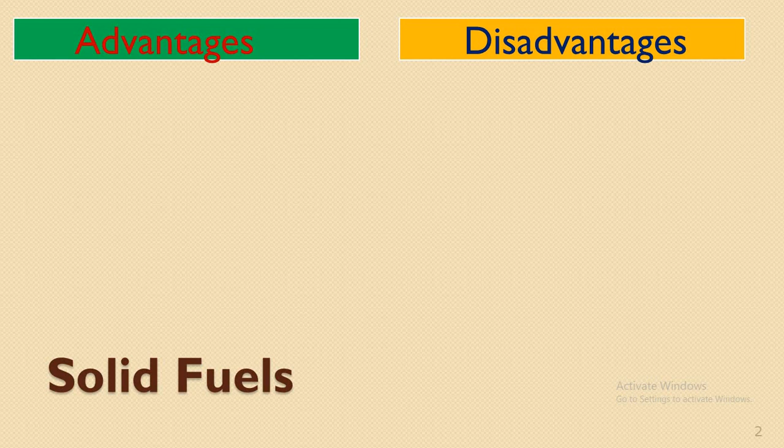we'll talk about a few advantages as well as disadvantages. Now the advantages of solid fuels are: solid fuels are easy to transport. Most of them are usually moved from one place to another using goods trains, by means of ship, or by means of road. So it is very easy to transport solid fuels without any fire hazards; they are more safe to transport.

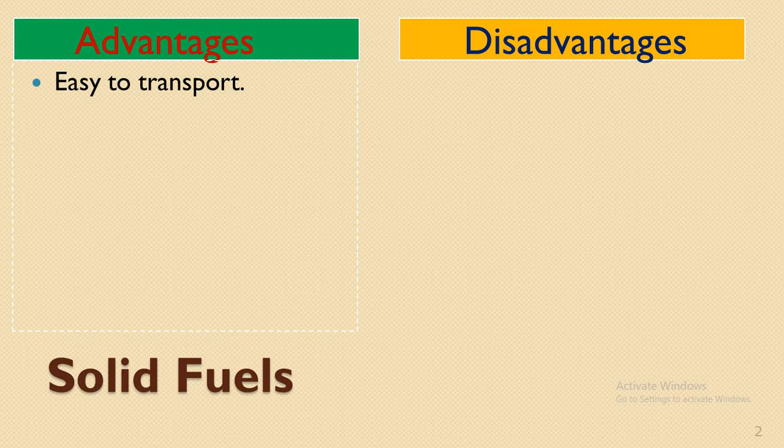They are convenient to store without any risk of spontaneous explosion, as I have already told you. Usually, in order to ignite the solid fuel, it takes a higher ignition temperature compared to liquid and gaseous fuel. It is not so spontaneous in its combustion reaction; it takes its own time to set its ignition and allow the combustion reaction to occur.

Apart from that, the cost of production of solid fuel is usually low. The cost of processing or extraction of this fuel from natural resources is usually considered to be low compared to the other forms of fuels, that is liquid and gaseous fuels.

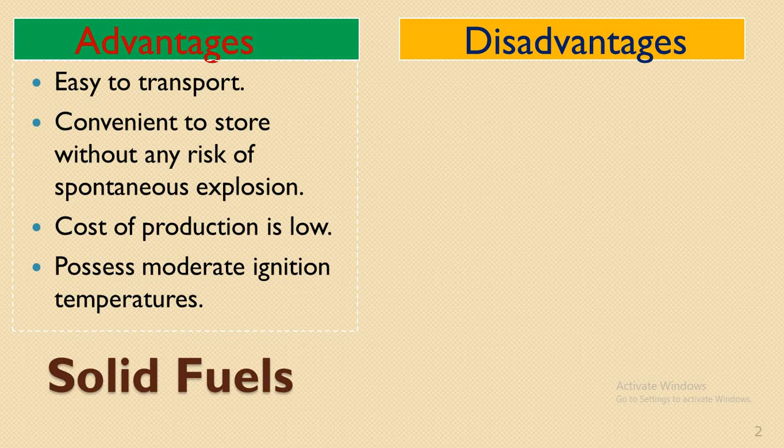And apart from that, they possess moderate ignition temperatures. As I have already told you, the ignition temperature should neither be too low nor too high. So when ignition temperatures are moderate, they would be properly utilized and would not cause any fire hazards. It is easy to handle such kinds of fuel forms. So these are the set of advantages of solid fuels.

Now let's talk about disadvantages. The disadvantages of solid fuels: as you already know, it tends to form a non-combustible residual matter at the end of the combustion reaction, that is, ash content.

The ash content is high when it is burnt completely, and also a lot of heat is wasted during the combustion reaction, as a lot of heat is utilized in driving off the non-combustible matter as well. So it has low thermal efficiency, and it also has another problem in dealing with clinker formation.

As you know, the ash particles fuse together to form lumps of ash. This is called clinker, and during the combustion process, when fusion temperatures are attained, clinker formation results.

When clinkers are formed, these clinkers which form over the surface would not allow proper air circulation to the rest of the fuel present for combustion. Therefore, lack of air supply to the rest of the fuel leads to incomplete combustion and inefficiency of the fuel.

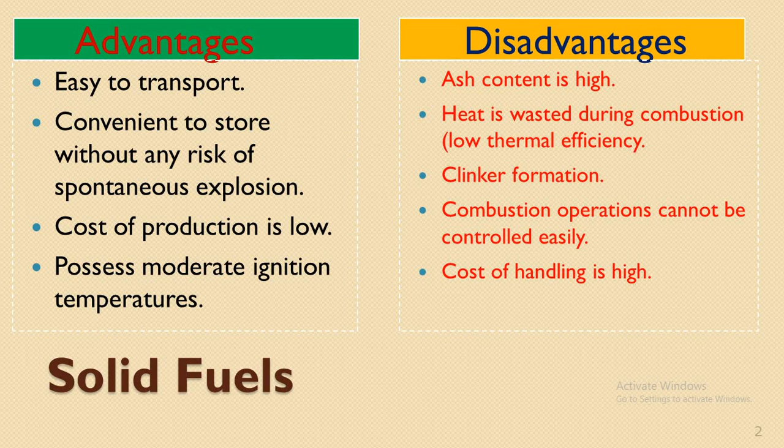And apart from that, because it has a lot of residual matter remaining after the combustion reaction is complete, you need to engage more labor to handle this residue after the whole reaction is complete. It also has comparatively low calorific value when compared to liquid and gaseous forms of fuel.

Usually anthracite has about 8,800 kilocalorie plus approximately of calorific value, whereas liquid fuel has about 11,600 plus calorific value, depending upon the refined form of petrol, diesel, or kerosene available, which is comparatively high. And similarly gaseous fuels have about 14,000 kilocalorie per kg or per meter cube.

So we have higher efficiency of the fuel when compared to solid fuel. Solid fuels are usually less efficient. The calorific value even of the most efficient form of solid fuel is recorded to be less than the liquid and gaseous forms.

And the excess air supply required is also more for solid fuels. You need sufficient supply of air for proper combustion reaction, else it leads to incomplete combustion, and the amount of air required for burning the solid substance is usually considered to be more.

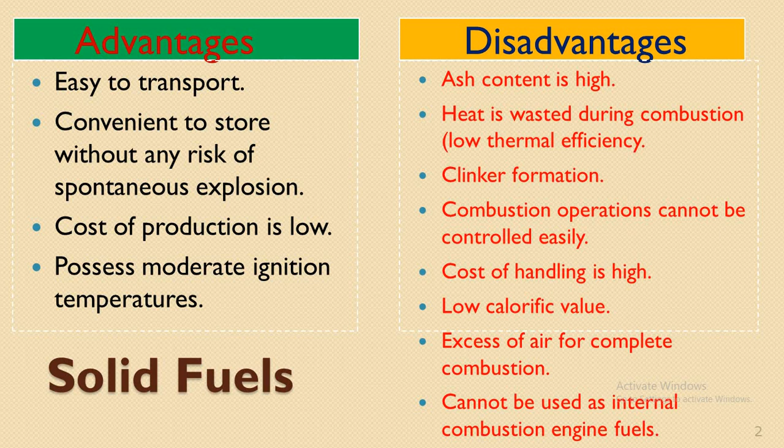So these are certain limitations or disadvantages of solid fuels. Over solid fuels, when we talk about liquid fuels, they are considered to be the better forms in handling, usage and efficiency. So let's talk about a few advantages of liquid fuels.

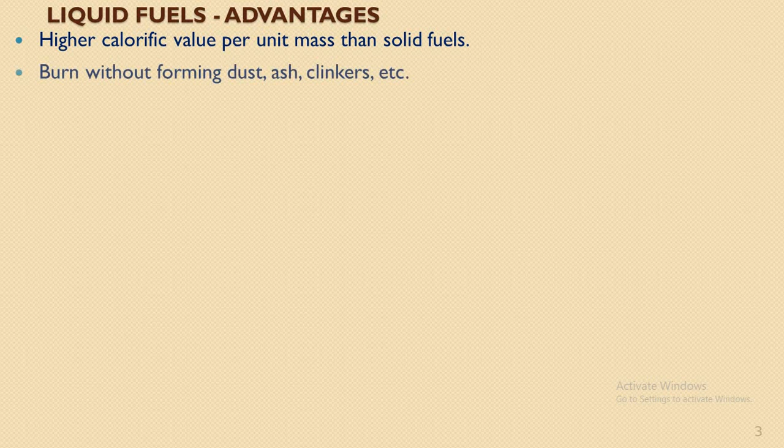They have higher calorific value per unit mass than solid fuels, and they burn without forming any ash or clinkers, and they do not emit dust during the combustion reaction. Apart from that, firing is easier, and fire can be extinguished easily by stopping the liquid fuel supply. As I told you, you can easily control the combustion reaction when using either liquid or gaseous fuel compared to solid fuels.

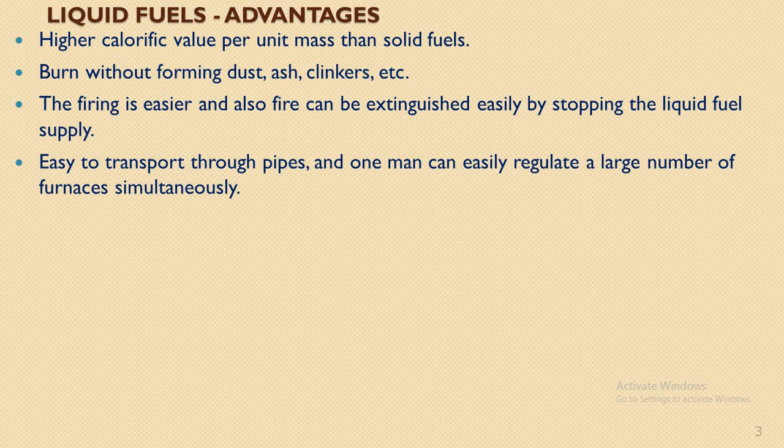Apart from that, you can easily transport these liquid fuels through pipelines, and the number of manual laborers required to regulate this process can also be less. One can easily regulate a large number of furnaces simultaneously, so one person can manage the whole handling process. They can be easily stored indefinitely without any loss—this is another advantage of liquid fuels. Using proper containers, they can be stored safely and utilized properly.

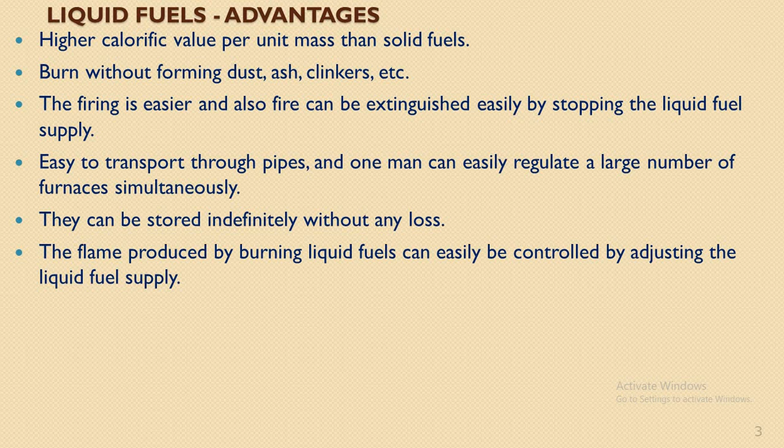The flame produced by burning liquid fuels can easily be controlled by adjusting the liquid fuel supply, as already discussed. They're more clean and economic in terms of labor. The residue formed at the end of the combustion reaction is usually less compared to solid fuels, so they are more economic in terms of engaging manual labor. Also, the loss of heat to the chimney is very low due to greater cleanliness.

If you observe in most rural areas, those still using solid fuels like coal or wood, you'll notice the kitchen is equipped with a chimney, a very long chimney which moves out, helping remove the formed dust or smoke evolved from burning the solid fuel. There's a lot of heat loss during this process, so with liquid fuels you can actually reduce the heat loss from the chimney as well.

There is a great amount of cleanliness maintained at the place of work, and the labor engaged in managing this fuel is also less. So these are certain advantages.

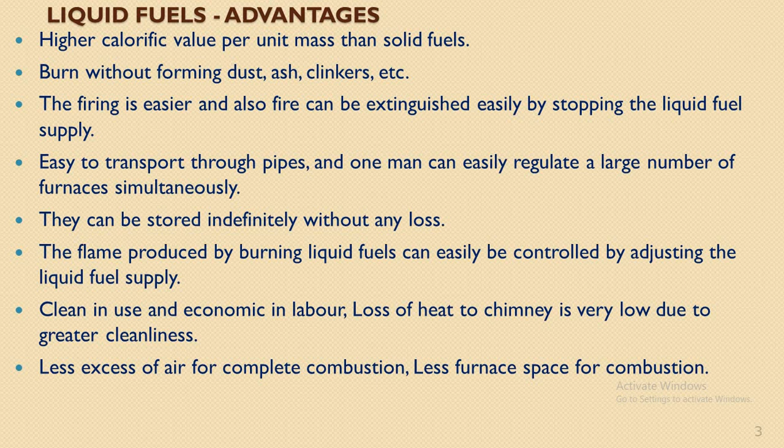Apart from that, compared to solid fuels, the amount of air to be supplied for proper, complete combustion is also less. There's no wear and tear because it's not a solid fuel—the wear and tear of grate bars and cleaning of fires is usually less compared to solid fuels. So these are the main advantages.

Other than that, liquid fuels can be used in running internal combustion engines. Today we see a lot of internal combustion engines run with liquid fuels like petrol, diesel, etc. Your automobile engines are usually internal combustion engines, so they can be conveniently run using fuel forms which are totally liquid in nature.

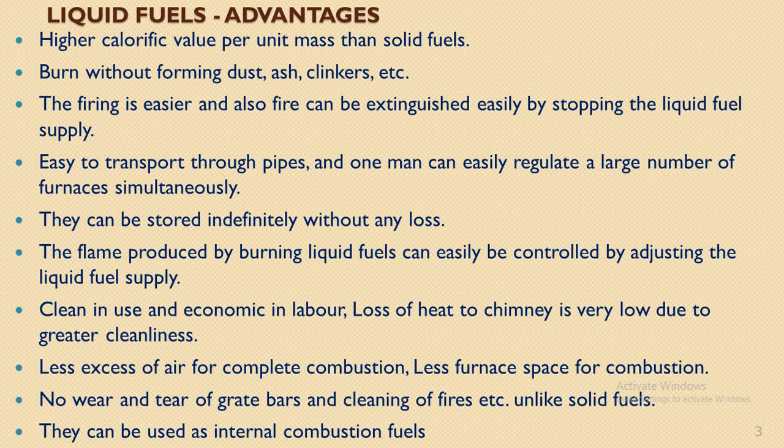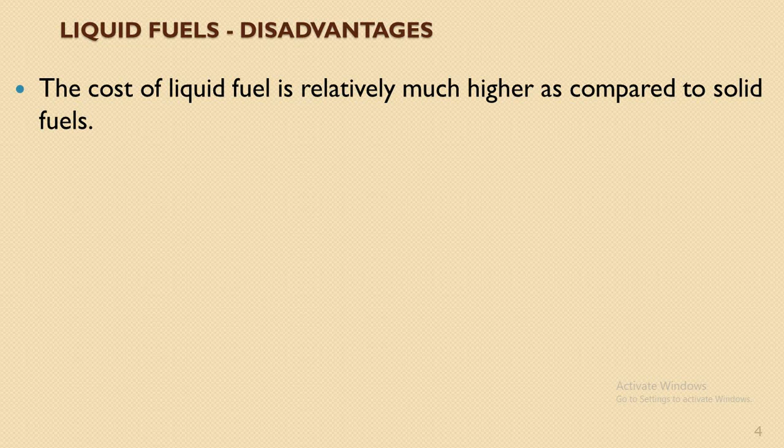So these are the advantages, and let's discuss a few disadvantages of liquid fuel. The cost of liquid fuel is relatively much higher compared to solid fuels. The cost is more because of their comparatively lower abundance in our country, and apart from that, the processing of liquid fuel is usually more costly.

Costly special storage tanks are required for storing liquid fuels. When you compare the storage equipment required for solid and liquid fuels, it is usually observed that for solid fuel, any dry conditioned space is sufficient. Though the space occupied by solid fuel is more, maintaining dry conditions is sufficient for storing it properly, and you don't easily find fire hazards occurring when storing the solid form of fuel.

Whereas for liquid fuels, you need to have proper storage tanks engaged, which again is a cost affair that is comparatively more than for the solid form of fuels.

There is a great risk of fire hazards compared to solid forms of fuels, because mostly in summer there are more fire accidents occurring due to the volatile nature of petrol. The volatility of petrol is considered to be almost at room temperature, so a greater amount of fuel can actually go to waste when such fire accidents occur due to its volatility. So the volatile nature of the fuel is actually reducing the possibility of using it more safely.

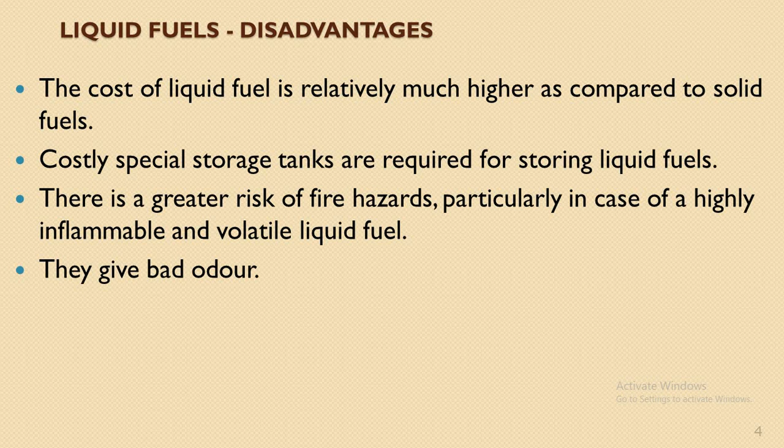They have bad odor. This is another disadvantage of liquid fuels. Usually when you go to petrol bunks, you can see such strong odor coming out from the bunks with liquid fuel forms, that is petrol and diesel. So they have a lot of odor that affects the area where it is stored and where it is used.

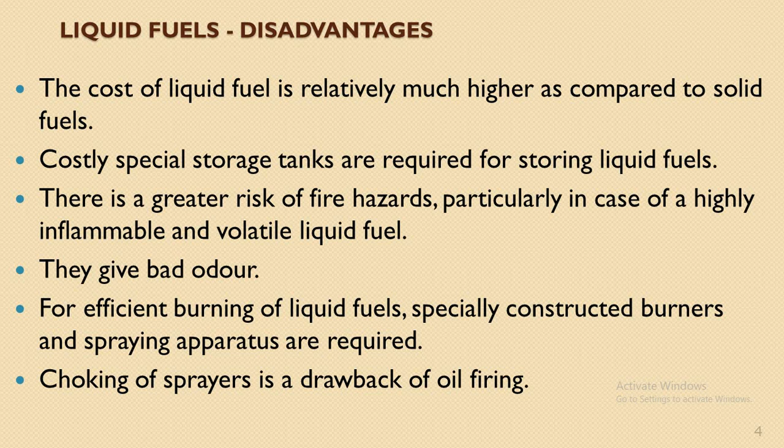For efficient burning of liquid fuels, specially constructed burners and spraying apparatus are supposed to be used. These apparatus are usually designed so that there is proper utility of these liquid fuels without any problem, that is, without any fire hazards caused at the place. Especially when choking of sprayers occurs, it leads to a drawback of oil firing. So it immediately sets fire at the place and may cause serious fire problems.

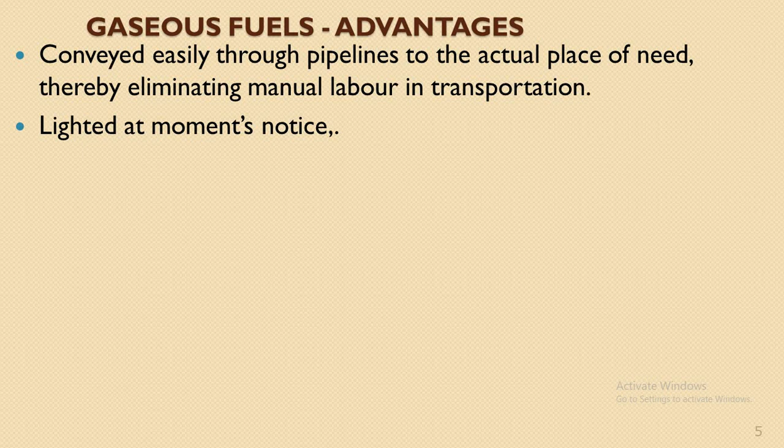Now let's talk about a few advantages of gaseous forms of fuels. The gaseous fuels mostly used in day-to-day life are CNG and LPG. These gases can conveniently be moved from one place to another through pipelines, giving very easy transportation without much manual labor. They can also be lighted at a moment's notice, that is, ignited very easily, and they have high heat content, helping us achieve higher temperatures.

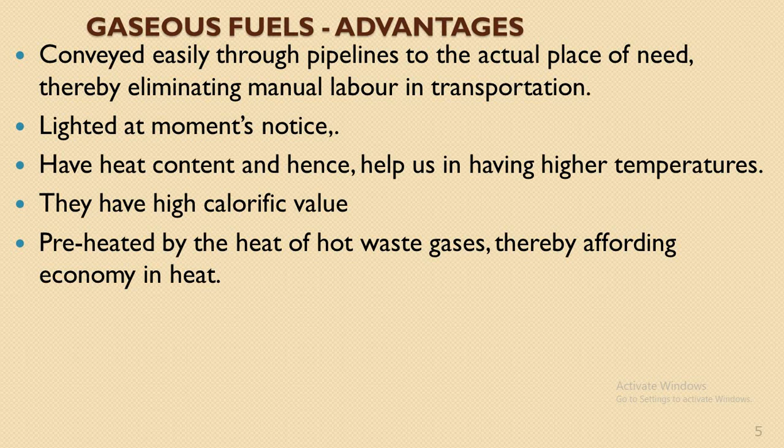LPG has a calorific value of about 27,000 kilocalories per cubic meter, which is very high compared to solid and liquid fuels. So the heat content of gaseous fuels is usually high, while the carbon content is comparatively less. They have a high calorific value and can be preheated by the heat of hot waste gases, affording economy in heat, that is, they allow proper convection of heat, making heat management more economical.

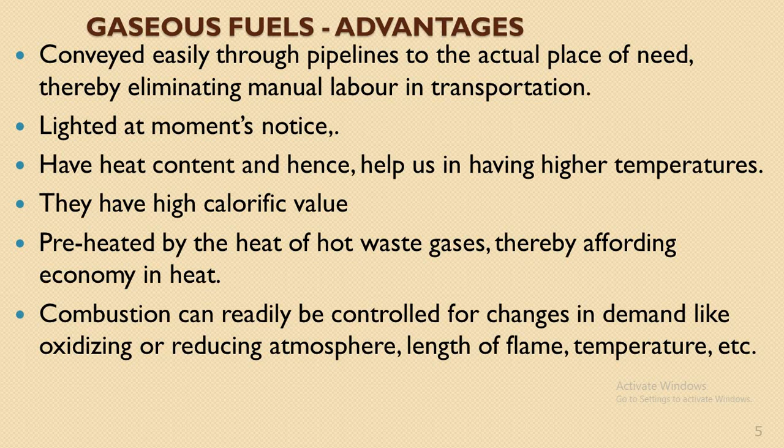Apart from that, combustion can be readily controlled for changes in demand, like oxidizing or reducing atmospheres, length of the flame, temperature, etc. As we observe in the equipment used for LPG at home, that is, regular stoves, you can easily switch on and off or simmer the gas to reduce the flame. So combustion rates can be easily managed and controlled, making the combustion reaction easy to handle.

Gaseous fuels burn without any soot, and no ash content is seen, so there's no labor involved in ash handling. With solid fuels, there is a lot of wastage in the form of ash after combustion, whereas liquid fuels mainly produce soot formation at the edge of the flame, especially noticeable with kerosene. It's comparatively less with petrol and diesel, and soot formation is very minimal when burning gaseous fuels, meaning less residual matter and less labor in handling it.

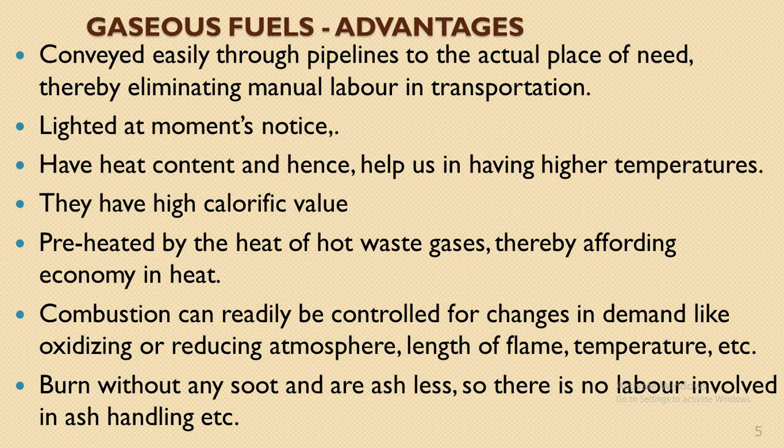So gaseous fuels have several advantages: they're very clean to use. Unlike liquid fuels, gaseous fuels do not have the possibility of spilling, nor do they form ash or soot like the other two fuel forms. They are very clean in use, do not require special burners, and achieve complete combustion without pollution, due to the proper uniform mixing of air and fuel.

When you have this gaseous fuel content, it mixes readily with the air. So the amount of air supply required for proper combustion of gaseous fuels is very less, because it readily mixes with air.

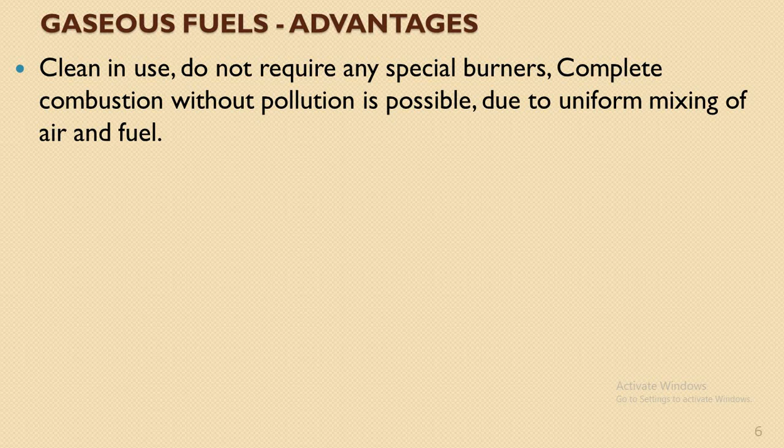So it can have a uniform combustion rate, and it can burn efficiently with less amount of air supply, without heat loss due to convection currents, in slight excess of air supply. The efficiency of the heating process is much more in gaseous fuel compared to liquid and solid forms.

Gaseous fuels are free from solid and liquid impurities. They have fewer impurities, because in case of solid and liquid fuels, you can see sulfur and nitrogen compounds that may be present. These elemental forms associated with solid and liquid fuels can be nitrogen and sulfur, whereas in gaseous fuels we do not find much possibility of such contaminants. So there is less possibility of contaminants.

When used in metallurgical preparations, like the blast furnace used in extraction of iron from its ore, if coal is used as fuel and it consists of sulfur, that sulfur may combine with the iron formed during the process. When sulfur intervenes with the reactions during extraction, it leads to impurity of the extracted metal. Such possibilities are reduced when gaseous fuel is used in metallurgical processes. So that's a major advantage of gaseous fuel.

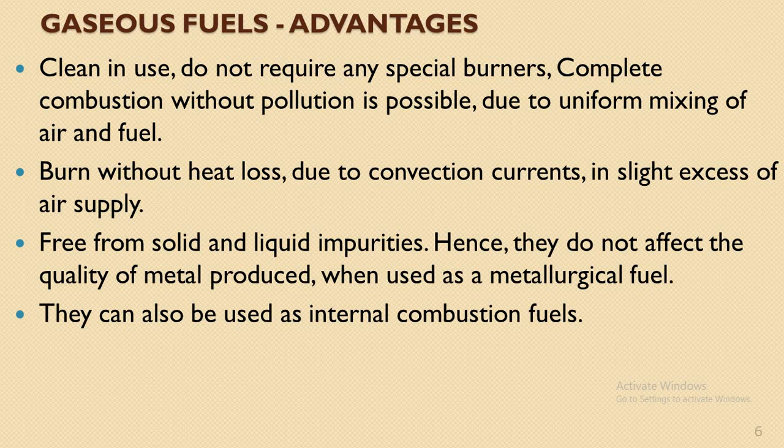The carbon content present in gaseous fuel is less compared to solid and liquid forms. Liquid fuels, like petrol, have a minimum of C5 to C8 carbon molecules, whereas gaseous fuels have just about C1 to C4. In CNG, methane is most likely the major constituent. So the carbon utilized is of less content, and less pollution is possible with gaseous fuels. We can conveniently use them in internal combustion engines, with more efficiency and less pollution, which is of greater advantage.

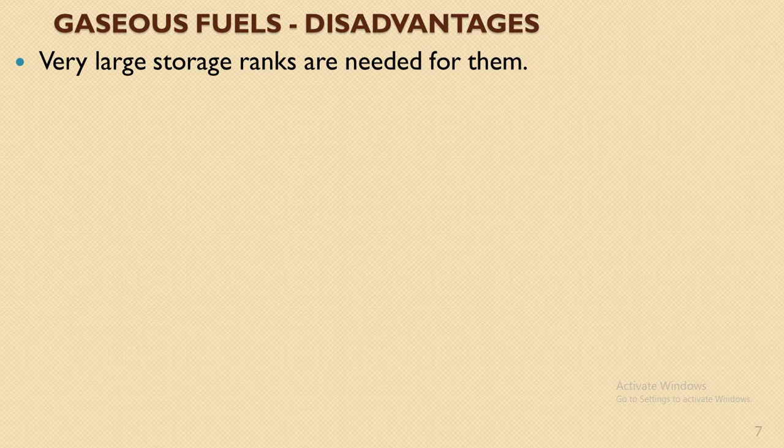Now let's look into the disadvantages of gaseous fuels. The first and foremost disadvantage is that very large storage tanks are required, and the setup of storage equipment for gaseous fuel is quite costly, because you need to maintain stringent temperatures as well as pressures. The cylinders at home are maintained under pressure, and similarly, most gaseous fuels have to be maintained under stringent temperature and pressure conditions. So the equipment used for storage is usually costly.

They are highly inflammable, so chances of fire hazards are high in their use. This is another major disadvantage we encounter with gaseous fuel, because they readily mix with air, causing more chances of damage during combustion. Fire hazards largely cause more loss due to their highly inflammable nature. If a cylinder undergoes any leakage at domestic levels, these are most of the fire accidents we encounter, as you must have observed in newspapers. The damage at such places is very huge, because combustion takes place at a rapid rate and is non-controllable at those instances. When it spreads to the whole area, it readily mixes with air and leads to uncontrollable levels of combustion reaction. So this is one major disadvantage of using gaseous fuel.

Gaseous fuels are also more costly as compared to solid and liquid fuels, because the extraction process and their utility process are also costing high.

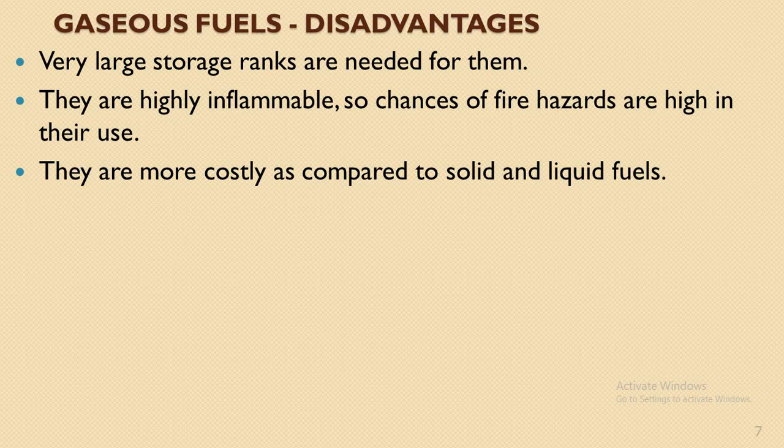So we have discussed in this video the advantages and disadvantages of various forms of solid, liquid and gaseous fuels, and we have talked in general about how these solid, liquid and gaseous fuels vary with their properties. Okay, thank you.